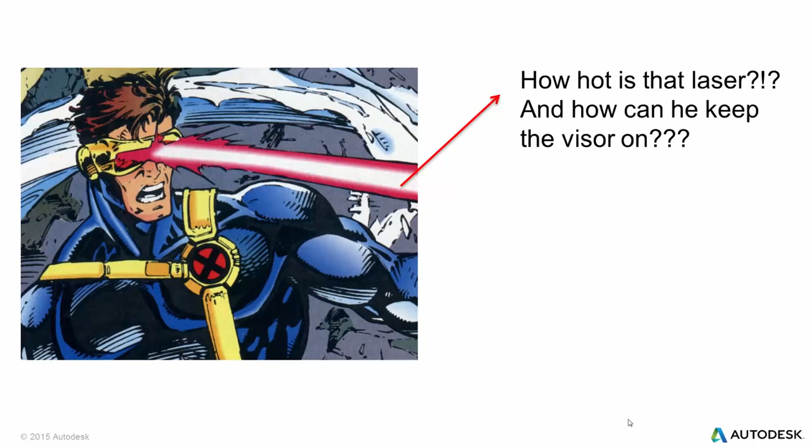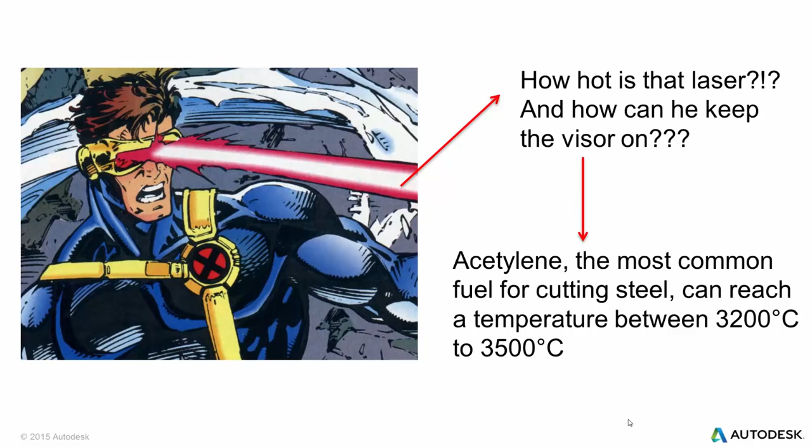So we all know who Cyclops is if we're watching this. He's the kind of tool bag leader of the X-Men, shown right there in the blue. But what I'm really interested in is that fancy visor that he's wearing. He shoots a laser out of it, and it has to get hot. So how hot is that laser, and how can he keep it on his head for so long?

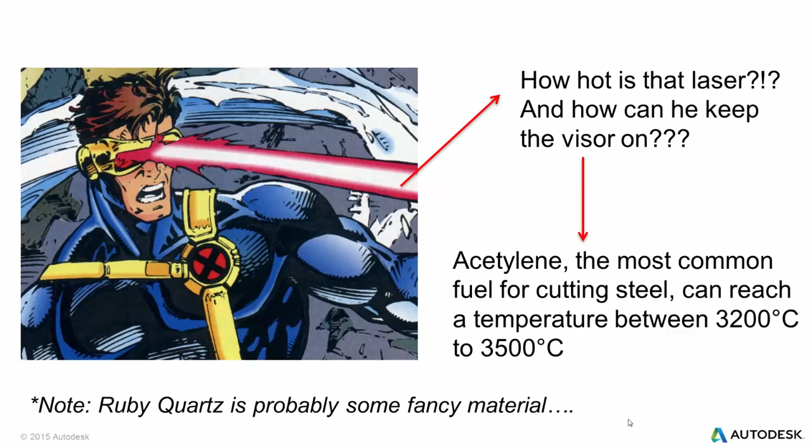I know I've seen him cut through steel with this thing, so I thought that would be a good starting point. An acetylene torch, the most common fuel for cutting steel, reaches somewhere around 3,500 degrees C when cutting. I'm told the average is about 3480.

One note: the visor is said to be made out of ruby quartz, which is probably some fancy material that doesn't really exist, so we're going to have to factor that in a little bit.

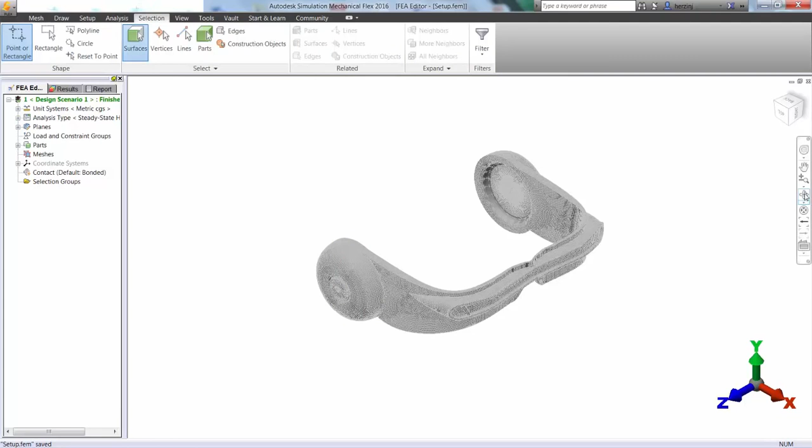To start, let's open up a step file in Simulation Mechanical and apply a mesh. To do that, you just click the Generate 3D Mesh button. As a note, we could be doing this in Simulation CFD or in Nastran InCAD as well.

With the part meshed, we're now going to apply our loads and boundary conditions to the model. We'll start by selecting some surfaces, picking all of those surfaces that Cyclops is going to be shooting that big red laser out of.

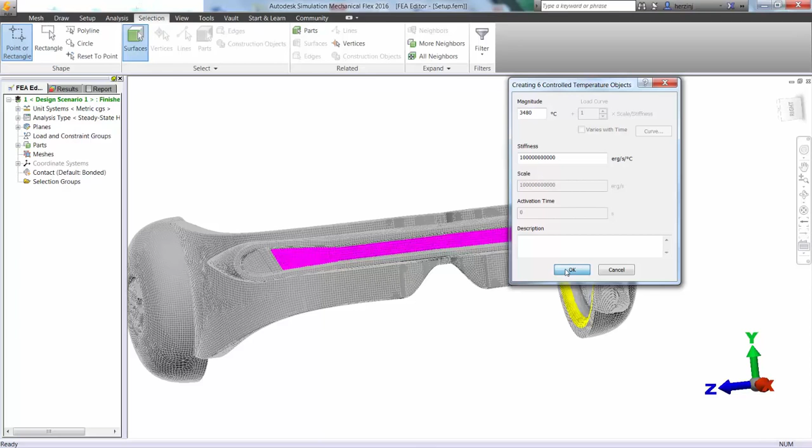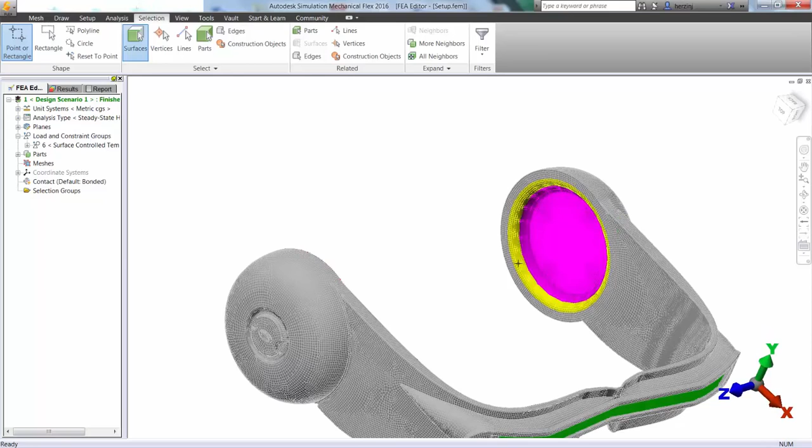With those selected, we can right-click and choose to add the condition we want. This time we're going to use a surface-controlled temperature and define it to be 3480 with a high stiffness value. This means that no matter what we do, that surface is going to remain at that constant temperature—the higher the stiffness, the harder it is to change that value. So we know that laser shooting out of there is going to be pretty warm.

Now we're going to give Cyclops the benefit of the doubt and assume that somehow he has some sort of cooling going on in the area that it's strapped to his head. So around those ears areas, we'll again define another surface-controlled temperature, this time closer to room temperature, say 22 degrees. This will show that these temperatures in that area remain cool, assuming this thing is made out of some technology I don't really know about. But let's see how much the rest of it heats up.

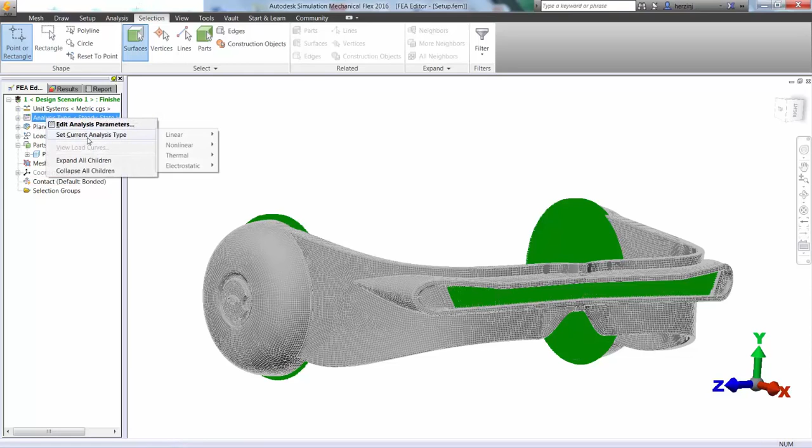Next, let's define our materials. If we go and edit material, we can see what we have to choose from. No ruby quartz listed here, but we do have quartz of some sort, fused quartz. So let's just assume these properties are relatively the same, because I couldn't actually find material properties for ruby quartz. Go ahead and click OK.

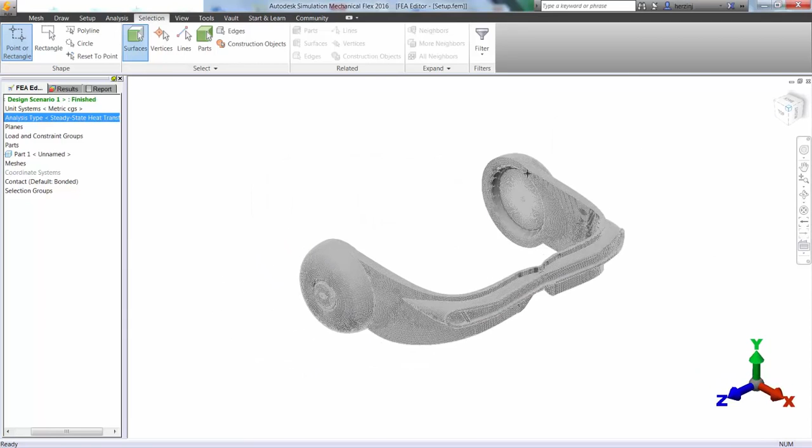Lastly, we're going to go into our analysis parameters and set up the multipliers to make sure everything is active when we're running our analysis. We'll define a default nodal temperature of 20 degrees C, and then we're ready to solve. Keep in mind, this setup is the same for any steady-state analysis you're going to be running, be it Cyclops Visor or something a little more realistic.

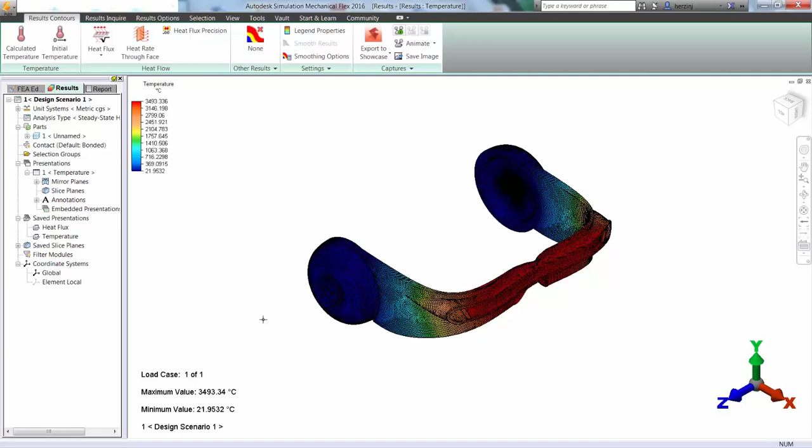So let's press Analyze and quickly get to our results. Here you have it, the meshed results of the visor, where we can see that in the area the laser is shooting, it's still up around the 3,500 degrees C area. The ears are still around 22, but even in the other parts, we're looking at something in the range of 1,500 to 2,000 degrees C.

This says to me that this is going to melt poor Cyclops' face off, or at least blow up the metal that it's made out of. So I think the X-Men need to give us a little more detail about what this is actually made out of. If you do have any questions, comments, concerns, or information that I'm missing about this great design of his visor, please let me know, and I'll be happy to take that into consideration in the next analysis.